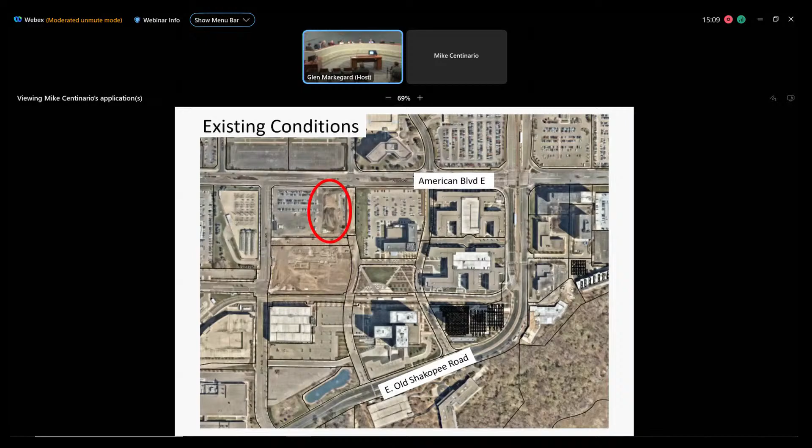We're familiar with the Bloomington Central Station area. It's within our South Loop district, so we look to not only the comprehensive plan, but also the South Loop district plan to inform our decisions on development within this area. BCS has been a development that's gone in phases since the early 2000s, and this is the latest residential phase.

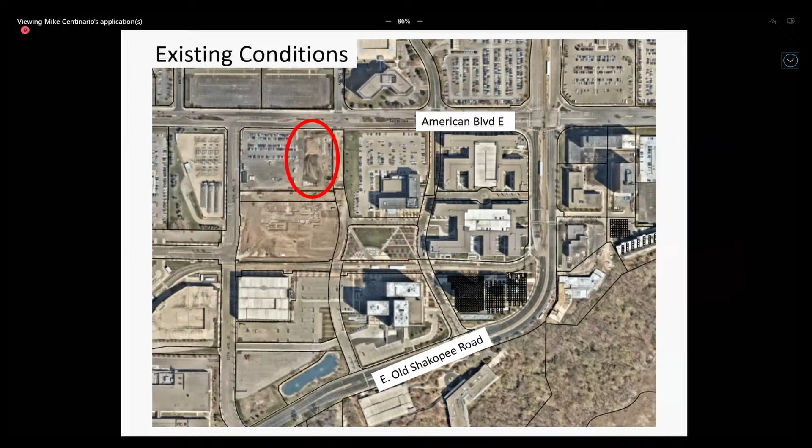You can see the site circled in red, essentially just northwest of the Hyatt Regency Hotel along American Boulevard and 31st Avenue. Here's a nearer-term image from last year. You can see BCS 4, or Carbon 31, under construction in this image, and that of course included Oxendale's grocery store, which was a huge improvement to the neighborhood to provide a grocery retail user.

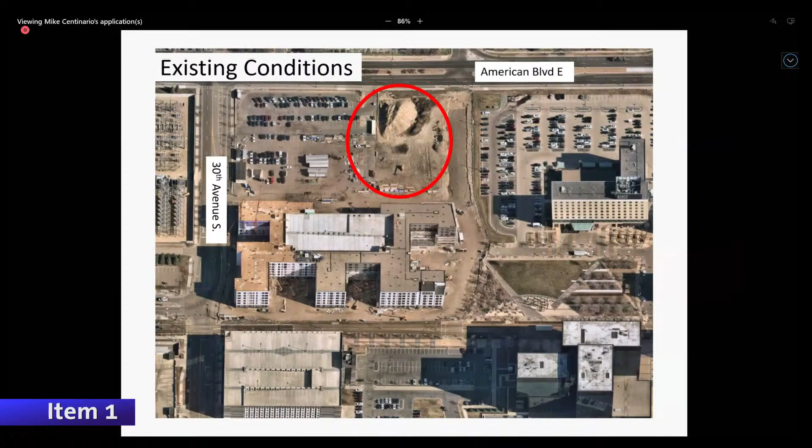This particular development is not proposing any retail, which I'll get to in a moment, and it's not proposing any affordable housing. We do have a code requirement related to affordable housing, but we also have the opportunity for a developer to pay fee in lieu, and that's what the property owner and applicant is seeking, to pay fee in lieu of affordable units.

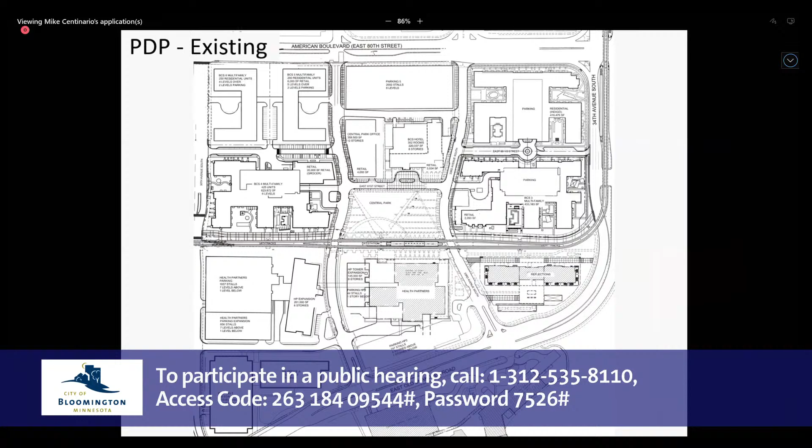Bloomington Central Station has an extensive PDP, preliminary development plan, and obviously we're not going to go into a deep discussion on the PDP itself. We're going to focus on this particular phase. So this is the existing PDP, and I'll zoom in to show you what is in place today.

The BCS 5 multifamily plan calls for 250 units and 6,000 square feet of retail with a mix of structured parking. That is why the applicant is seeking a major revision, because the unit count is proposed to go down and the applicant is proposing to remove the retail element.

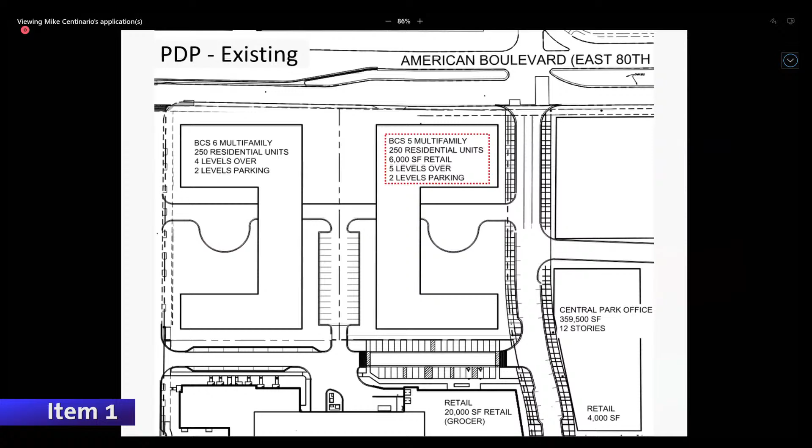So what I have here is the proposed PDP with the changes being implemented with the application, here is what's being proposed. Obviously, we go from the existing PDP, which just has building placeholders, to this, where you can see the actual footprint of what's being proposed. You can see the walkouts, how they relate to 31st Avenue and American Boulevard. You also see the unit count go down from 250 to 164, and the parking configuration is a little bit different, but the retail is no longer an element. It is directly across the street from Oxendale's.

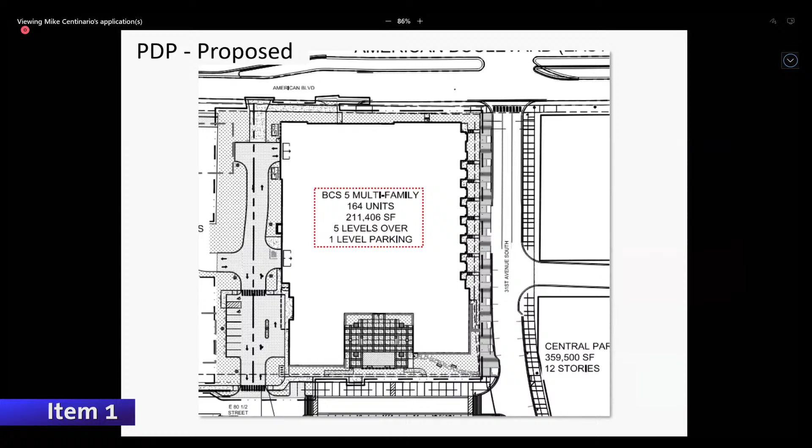In terms of code compliance, they are proposing to meet city code for trees and shrubs. We would have a landscape surety to ensure that it's planted and maintained. But again, a very significant amount of street trees, which helps that urban character.

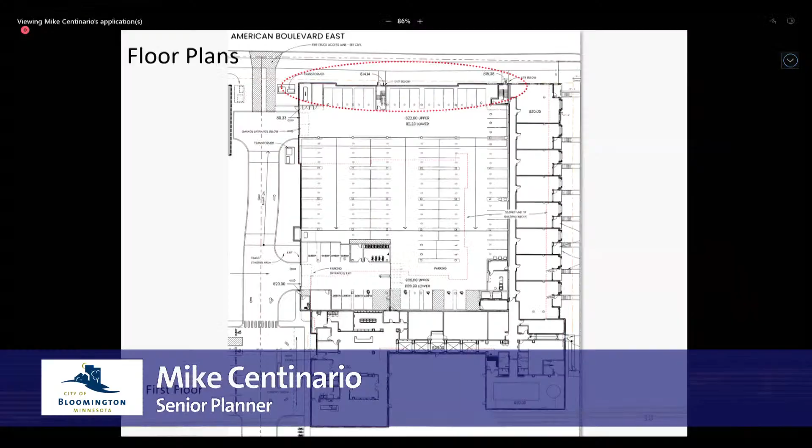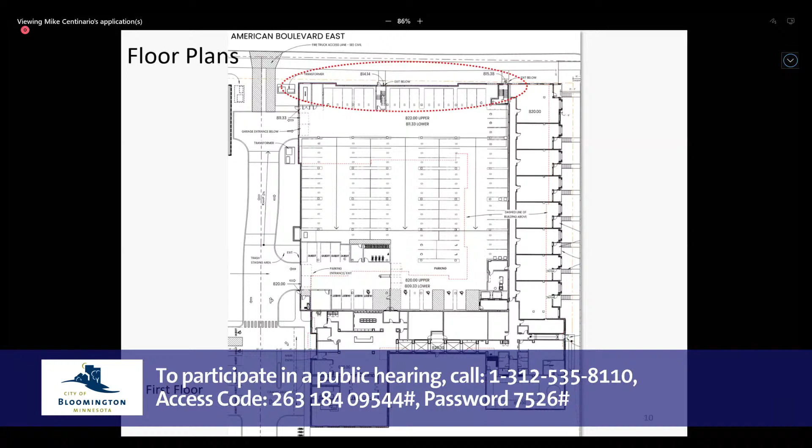A couple other elements on the design that I wanted to mention, which as staff we were really happy to see. This is a 5-story building, and on the east side you can see these walkout units, which we think is a really nice addition to the neighborhood, with windows, porches, and steps along the street. But when the applicant came before the city for pre-application meetings, we noticed there was structured parking on grade level, and we expressed concern that we didn't want to see a blank wall, because that wouldn't add much to the public realm.

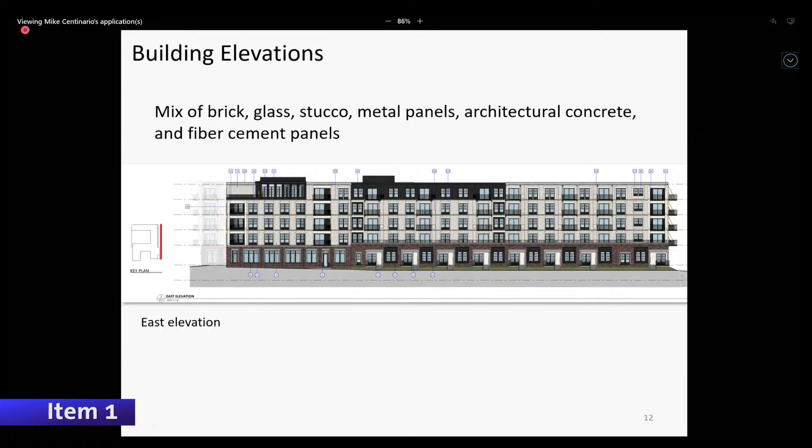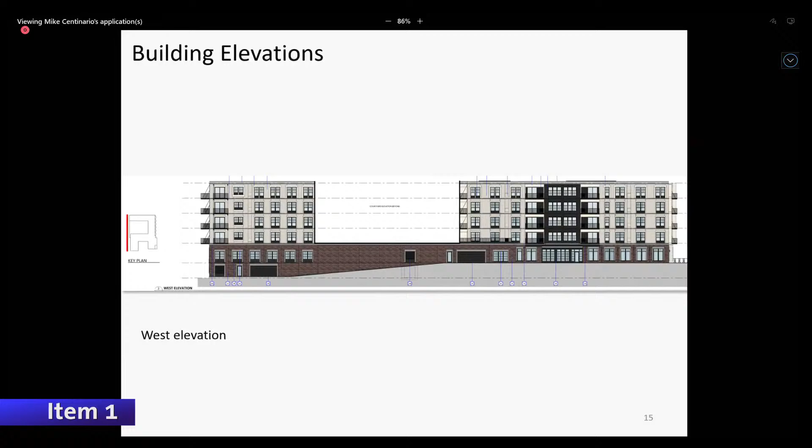One more elevation view, I'll get to the courtyard areas, which was the topic of discussion in my report.

This is the one area of flexibility that staff is not supportive of, and that is those inner courtyards essentially on the west side of the site. So they're not as visible, certainly, but because the applicant isn't proposing any affordable housing, they're not eligible for exterior material allowances to allow that secondary material to go up.

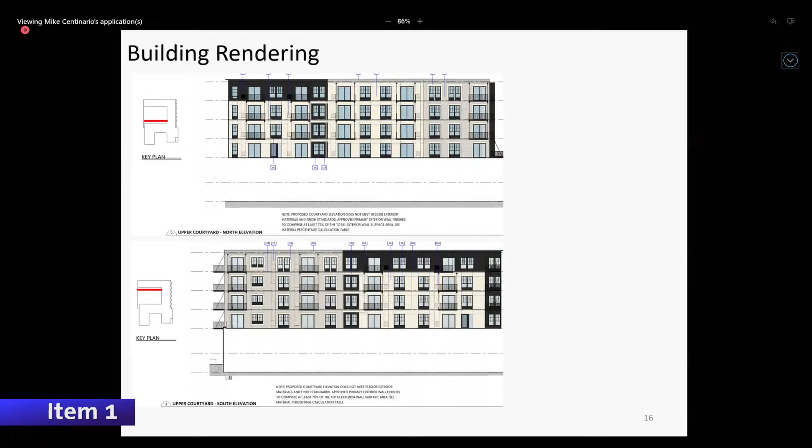Essentially, in this case, they want to have more fiber cement than would normally be allowed by city code. Fiber cement is a perfectly nice material, but we contend that it is painted, so inevitably it's not going to be as durable. The finish is not going to be as durable, certainly not as much as brick or stucco or glass. So we do have that limitation. While we're overall very supportive of the project, the conditions as written essentially just mean the applicant has to revise these small areas of the building to meet city code.

Parking, of course, is something that we look at. The parking calculation for senior housing, again, this is an age-restricted development. It's very simple, and so their parking requirement is 246 stalls. They're proposing 223. Most of that supply is coming in the form of those garage spaces, and then there are 18 spaces that are essentially allocated for this development.

We asked the applicant to prepare a graphic so we're not double counting stalls between different developments. So this is all shared parking, but we want to ensure that 10 stalls don't count towards 3 different developments. In any case, the amount of flexibility that the applicant is requesting is under 10%. Generally speaking, we find that the demand within Bloomington Central Station and South Loop District is less than city code, and so while this is flexibility that's being requested, we think the parking supply is more than sufficient for this development.

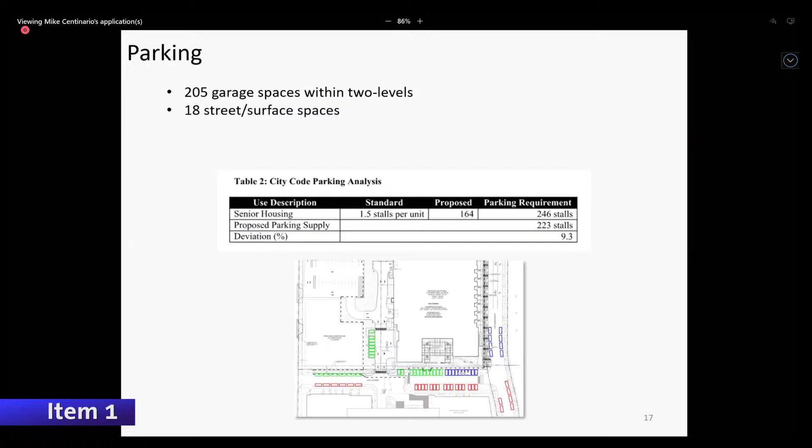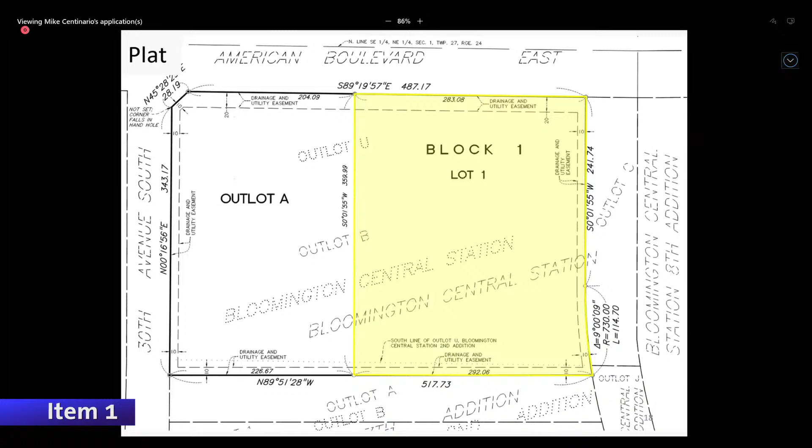Lastly, this is an image of the final plat. This is the instrument that creates lots, and the yellow box is where this development would be constructed. Then you can see outlot A, and that's really just the remnant that would be for BCS 6, should that move forward. So we are recommending approval of all of the elements: the preliminary development plan to change those characteristics of development, the final development plan for the 164-unit senior apartment building, and then the preliminary and final plat.

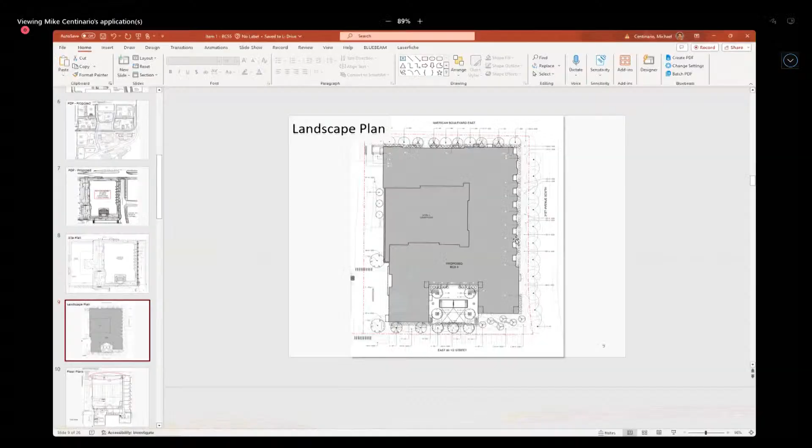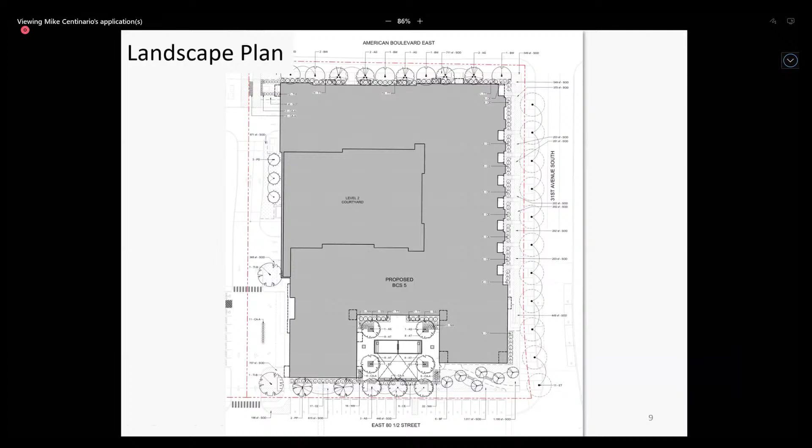Sure, absolutely, Commissioner. I think it'd be helpful if I go to this, it makes it easier to see. So commissioners, again, this is the landscape plan, but if you can see where it says level 2 courtyard, these are the 3 elevations, that interior courtyard area that they're seeking flexibility for. More specifically, they're seeking to increase the amount of so-called secondary materials. The code outlines what secondary materials are. They want that to be significantly greater than the allowance, which is only 15% of each building elevation.

How that relates to the Opportunity Housing Ordinance is that if you're providing affordable housing, the more affordable housing you have, the greater percentage for affordability, there's different levels of flexibility from that standard. So if you have a very affordable development, you're eligible to have less primary materials. Essentially, it's a development incentive for affordable units. Since this application doesn't include any affordable units, we didn't really see a compelling reason to support this flexibility.

Other questions for staff? Commissioner Goldsman: Thank you, Chair. One question about the courtyard. Is the courtyard a private use, or is there public access to that courtyard?

Sure, Commissioner. This is a level 2 courtyard, so it would be private. I'm sure folks will have parties and such, but it's for private use. Private use, thank you.

Commissioner Cookton: Thanks, Mr. Chair. Mr. Centinario, I believe this is zoned HXR. Does the HXR zone have a transparency requirement on the ground floor?

Commissioner, it does. Let me go to... I did not include those drawings, but thank you for bringing them up. There is a transparency requirement along streets, and in the application materials, the applicant included graphics that measured all of the transparent materials, and by all accounts, it looked like the application was meeting the transparency requirements.

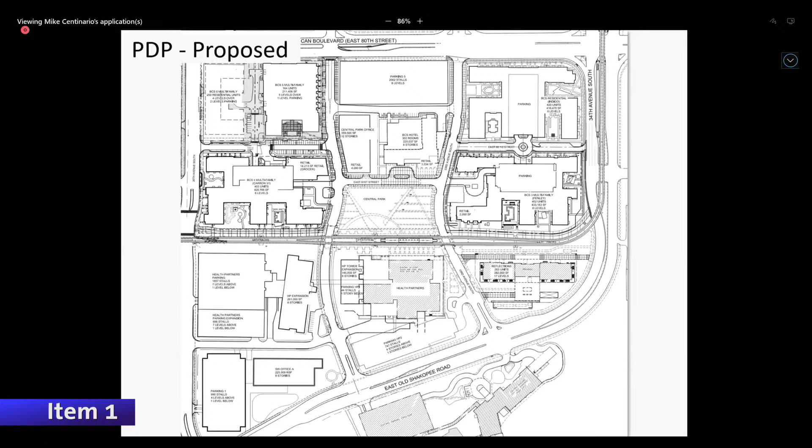Health Partners has existed in this area for quite some time. Reflections was developed shortly after, the beginning of this Bloomington Central Station vision, and that was obviously two glass condo towers. I'd have to look to Glenn to reach back in his memory and remember what those original PDPs envisioned, but I suspect it was more building height, more towers, greater proportion than what we're seeing now.

What's been developed in terms of residential has been 5- and 6-story residential buildings. The three previous residential phases are 6-story, essentially 5 stories on one level of concrete style development. And this one that we're reviewing tonight is 5 levels.

Chair Roman, Commissioner Curry, some of the major changes over the years at Bloomington Central Station with their preliminary development plan, probably the first on the far eastern side. Originally, there were proposals that the residential units would be in more tower format, similar to Reflections. What they ran into was just financial realities, that the cost of that construction was not penciling out. It was not financially viable. So they switched to more of a wood frame design for the two phases on the east side to the north of that.

The density did not change, and in fact I think it even increased a little bit relative to the previous plan, but the style of the units changed. And then on the western side, the main change has been, over time, the conversion of office space. When this was originally proposed, there were a lot of office buildings proposed, which market conditions do not support anymore. So several of those planned office buildings have been converted through plan amendments to residential.

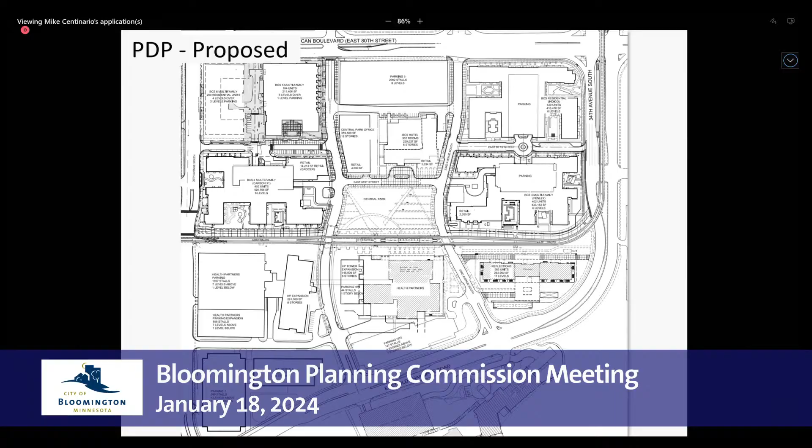To add to that request for flexibility, we're imagining that the intent of the exterior material standard is to ensure a positive impact on the public by guaranteeing a certain amount of high quality building finish. Based on the fact that these elevations are largely not visible, we think we're meeting that intent and really not affecting the public realm at all.

There's vertical separation - that courtyard and those elevations are elevated 14 to 22 feet above the adjacent grade. The west elevation is the only one that directly faces a right of way, and that's 31st to the west, more than 400 feet away from that right of way.

The north and south elevations, while not facing directly a right of way, are still very far removed from American Boulevard and 80th and a half to the north and south respectively, by more than 200 feet in both cases. So given that vertical separation and the distance from where they can be viewed in plan, it makes sense, because they really are virtually invisible.

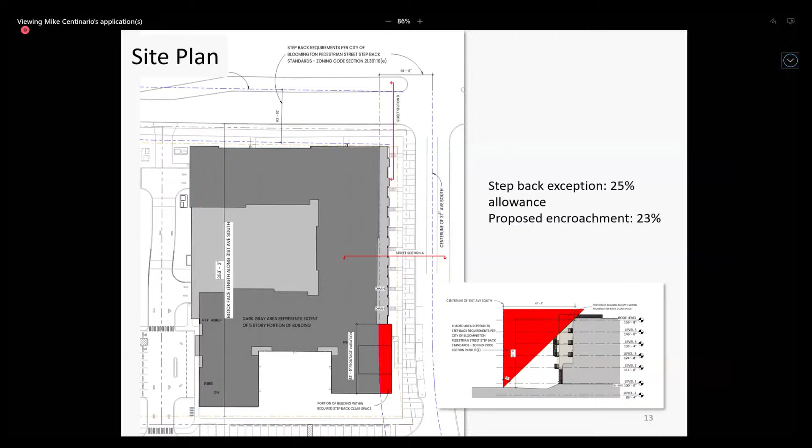Furthermore, for any potential oblique views, like from American or 80th looking diagonally at the project, we've essentially continued the primary material proportions around the corner for the first 35-plus feet. So we've got 95% primary material for the portion you could possibly see obliquely. So the concentration of secondary materials is relegated to a zone that's not visible by the public.

And with that, I'll turn it back to Joy or Johnny. I appreciate your time. Thank you, Ryan. I don't have anything else. Yeah, I just want to say thank you. We're really excited to keep the momentum going in BCS. If you have any questions for either Joy or myself.

Thank you. Questions for the applicant. Commissioner Albrecht: Thank you, Chair. My questions are regarding the market in both the city of Bloomington and in the region. What is the absorption of senior housing in either the market, the region, or the city of Bloomington? And what are you seeing in terms of senior projects and parking absorption in those projects? Are you seeking deviations in other locations?

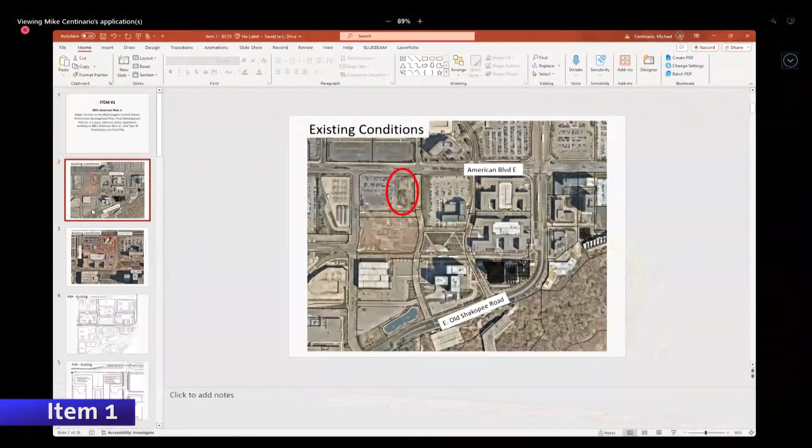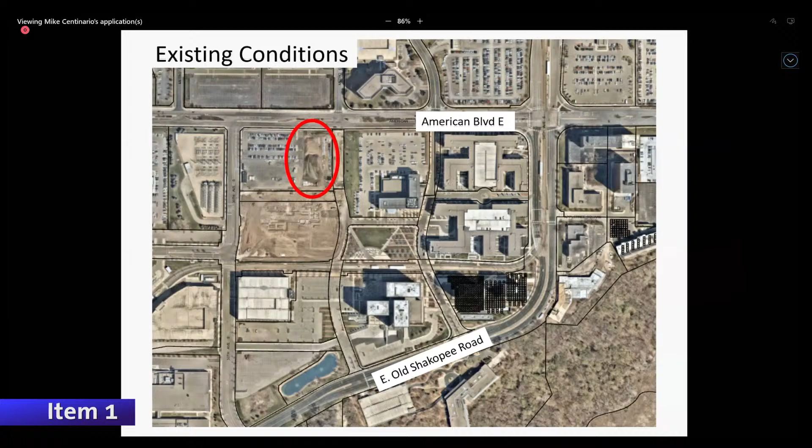Commissioner Goldsman: Thank you, Chair. If staff could bring up the aerial view of the map, specifically showing the additional development opportunity. I know it's to the... I'm bad with cardinal directions here, where that parking lot is. We're looking at another potential development, correct?

In that development, is there any retail space opportunity, or is it strictly residential? Commissioners, the PDP that they're proposing shows it as 100% residential. Again, that could evolve, but they're not proposing any retail space on the BCS 6 phase. Great, thank you for answering the question.

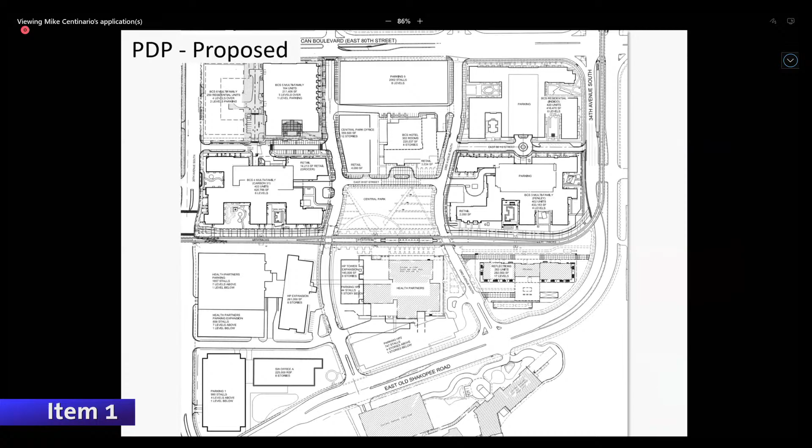And I know there was some discussion in the materials we have, but on the south elevation facing 80th and a half, there is, at the southeast corner, a different setback than at the southwest corner, but then there's a fairly significant setback in what I assume is intended to be the front of the building. Talk about that. I understand there was some reference to utility easement, but generally how do we have something that is not aligned with the urban character of the neighborhood.

Yeah, I can address that, and if Ryan could unmute himself to help me, that'd be great. So on the south side of the building, that is our grade level courtyard there. We hope to activate that space with some grilling stations, furniture, and turf. But the reason why we held the building back a little bit is to gather those views of the park right across the street. That was one motivating factor for us.

Also in that area, the Oxendale's parking is head-in, very close, so that gives a little bit of a break. Ryan, do you have a probably more eloquent response than that? I think you did a fine job, Joy.

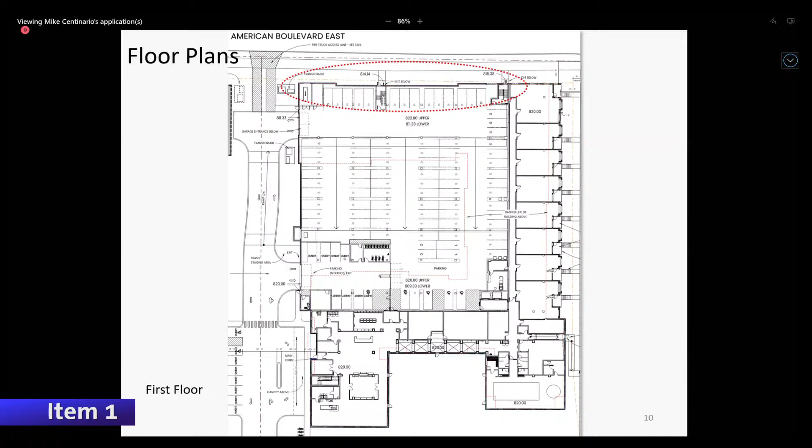That's exactly what we did, and at grade by pulling what you can see is the pool room back. It is a gesture towards the Central Station Park, but also provides additional at-grade landscaping opportunity that we took advantage of in the landscaping plan. Other than that gesture, our forward-facing faces of the building are pushed out almost as far as we can push them, so that we actively engage the street and create that premier pedestrian experience that's been a signature of the previous BCS developments.

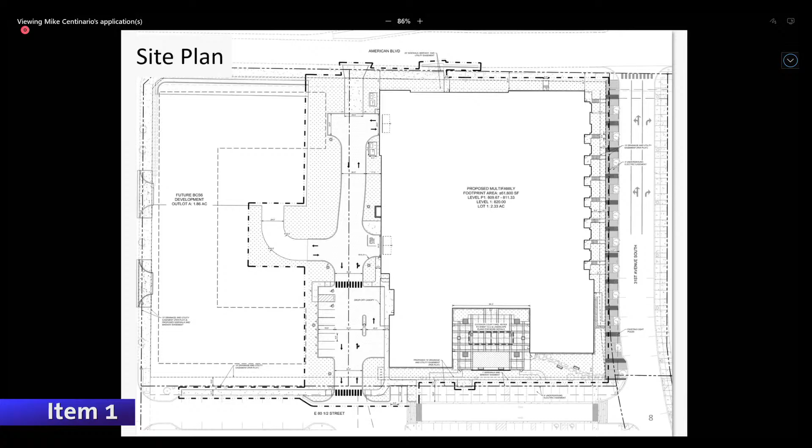Thank you. Other questions for the applicant? Commissioner Cookton: Mr. Chair, thanks. Ms. Jerem, the walkout units, is that something you like, or is that my city staff colleagues pushing you to do that?

I actually like those units. They're great units for people with a pet. There's a park right down the street. Speaking construction-wise, it also works out well. We've got a nice concrete podium there, and those units don't have to stack with the ones above for plumbing lines, so we can create something special on the street. Okay, thank you. Other questions?

Other questions? Thank you. You're good. Thank you. Thank you very much.

This item is a public hearing, so I would invite any member of the public who would like to testify on this item to the podium for a 3-minute testimony. Seeing none, and seeing none online who are not staff, I would entertain a motion to close the public hearing.

So moved. Second. Thank you. We have a motion and a second to close the public hearing. Discussion? In favor, say aye. Aye. Opposed? The public hearing is closed. Discussion on the proposal.

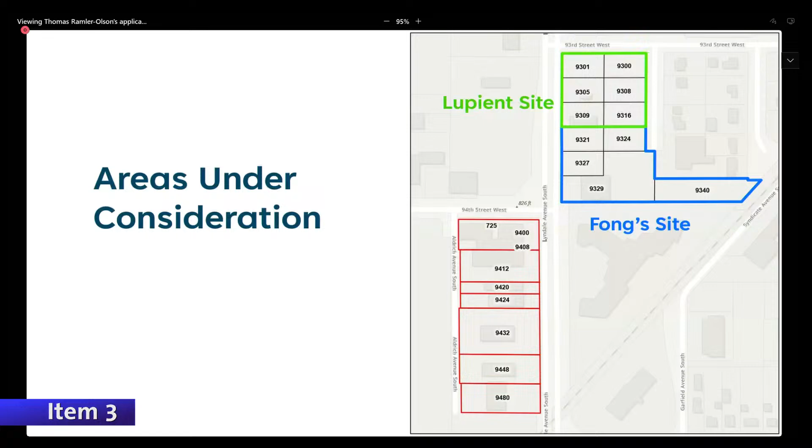What brings this item forward, as was hinted before, is the suburban retrofit plan that was approved back in 2021. We recognize that it focused on certain nodes along the stretch of Lyndale, one of the nodes being at 86th and 98th.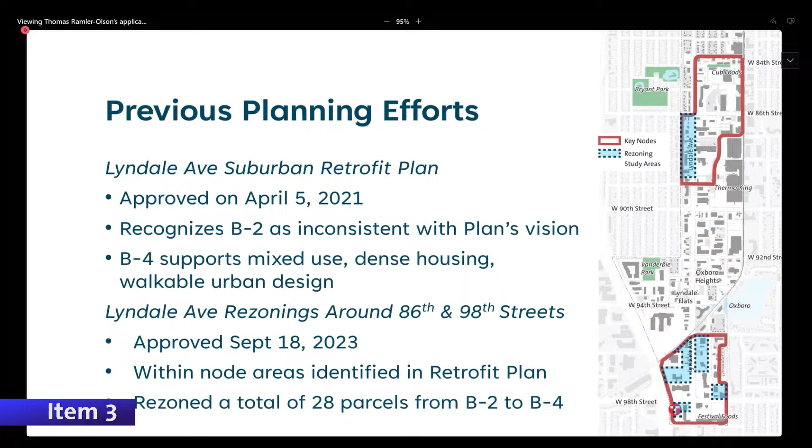If you recall, back in September of last year, City Council approved some rezonings—you also saw those on August 17th of that year. Those rezonings were approved, going from B2 to B4 in line with the recommendations in the retrofit plan. What the retrofit plan was unable to foresee, or hadn't realized at the time of its adoption, was that there was a new node developing at 94th Street.

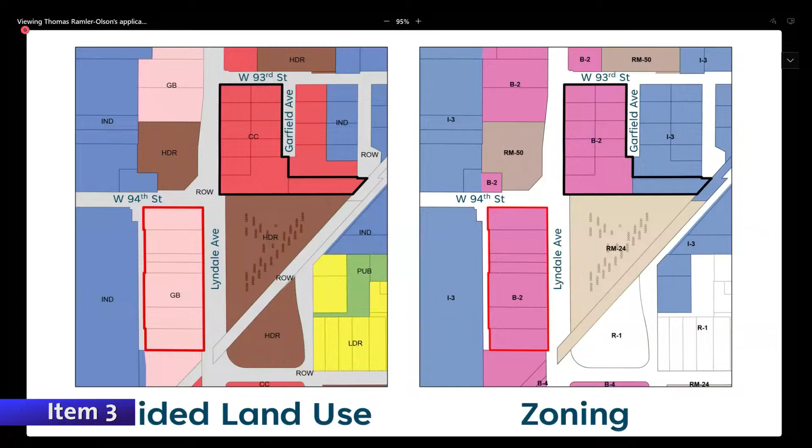These are maps illustrating the guided land use of the properties in question—what they're guided for in the comprehensive plan—and the surrounding land uses as well. On the right is the zoning. Obviously they're B2, but there's a variety of zoning districts around them that ought to be considered when deliberating.

As shown in the guided land use map on the left, the two land uses are general business and community commercial—those are just descriptions to get you familiar with them. You're probably familiar with B2, and it distinguishes itself from B4 by allowing more auto-oriented uses, which is something the retrofit plan wanted to reduce the presence of on Lyndale Avenue.

I should say it's been recounted to me—I wasn't there when the suburban retrofit plan was being written—but there were discussions that conveyed some comfort with having B2 properties along Lyndale. It wasn't recommending rezoning all properties to B4. So that's just something to keep in mind when you're deliberating about whether these are good candidates for rezoning.

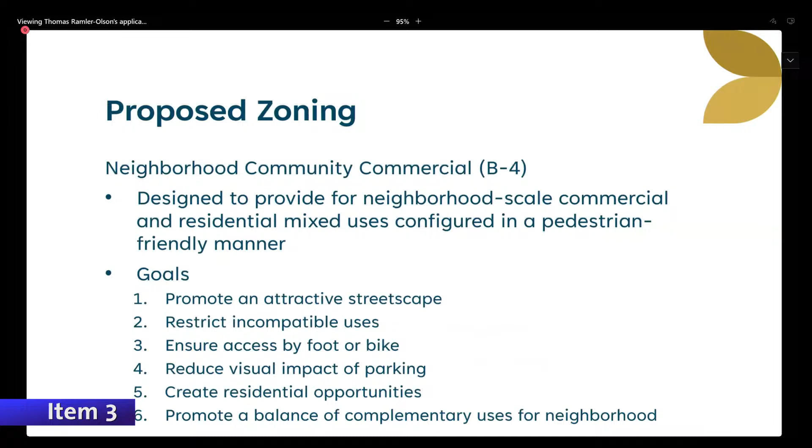B4 is also distinct from B2 by offering more neighborhood scale development, something that appeals more to the pedestrian and creates a more pedestrian friendly environment, more attractive landscape, and ensures access by foot and bike. So again, encouraging multimodal use.

Something that's always at the top of mind when you're considering rezonings is use, or just nonconformity. Are you creating nonconformities by rezoning? That is certainly a concern.

As far as the analysis that went into this part of the research, we looked specifically at use. It's kind of hard to delve into some of the site characteristics and whether they would comply with the new zoning. There are definitely lots that don't comply with the minimum lot area for B4, but that map I showed earlier shows definite potential for site assembly, so you could facilitate a larger development in line with the retrofit plan.

So use conformity seems to be the more operative concern. In that instance, there are a few nonconformities that would be created if rezoning to B4. There's presently an auto dealership along Lyndale in the area defined as Lupient, and there's also an auto repair place in the group of parcels just southwest of the intersection. So some nonconformities would be created.

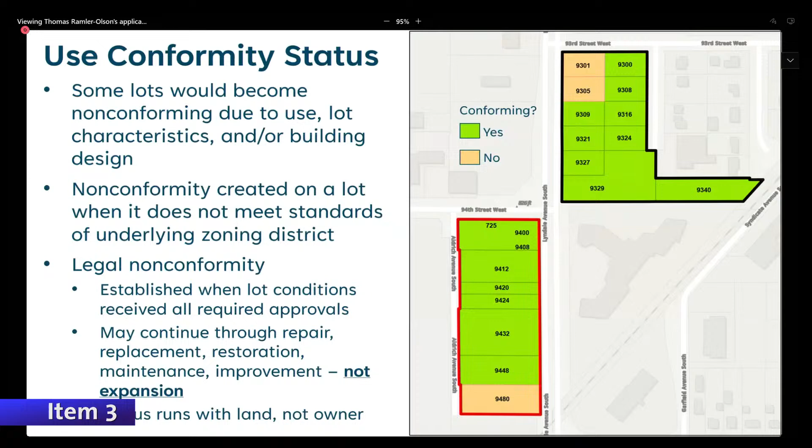As far as engagement, staff reached out to the Lupient representatives as well as David Fong's, and we had a conversation, explained the proposal, and answered any questions they may have had, to get their take on what staff was pursuing.

If we get direction to consider those parcels southwest of the intersection, we'll do the same sort of engagement activity. It won't be very widespread, but it will focus on those parcels under consideration.

Next steps after this are to bring this study item to council in February, and also a resolution to initiate that rezoning, and then over March and April hold public hearings to consider the rezonings. And with that, I can take any questions you may have.

Thanks. You mentioned that you had reached out to property owners. Is there a general sense of what you heard? To the extent that you can share?

To the extent I can share. Glenn, do you think I can share? I don't want to divulge anything, but yeah, it was a good back and forth.

The Lupient owners have had concepts before the city, and we've discussed that with them. Those haven't advanced, but nonetheless, they're still open to working with the city in order to find an appropriate development that would fit on the site, work with the zoning, and also the goals of the retrofit plan.

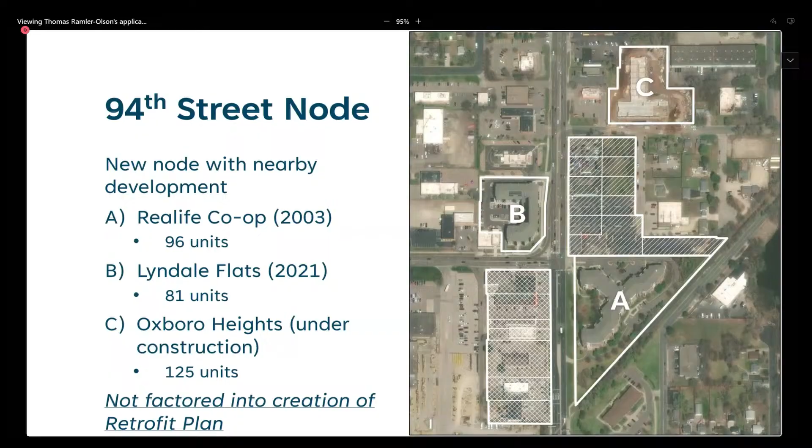The southwest parcels, I think, are also good candidates. I think we should proceed with that. Let's talk to those landowners. If there's a big problem, let's see what we can do about it. But I'd like to continue forward with investigation of those southwest parcels as well.

I think it's fascinating too, building on what you were just saying, is we're talking about B4 here, but at least in the northeast section, that could all end up being RM50, which again the applicants would bring to us. But I think we're talking about B4 because we're trying to make it less like B2, though it may end up being something completely different that is complementary, but not what we're talking about right now.

So, Commissioner Albrecht. Thank you, Chair. My only feedback on this is...

for staff to be cautious about the pushback from current property owners. I believe that we dulled down B4 by allowing pawn shop uses, and I think that we should try and maintain the spirit of the Lyndale retrofit plan. I know that was directed by City Council, but I was in disagreement with that. And I think just creating a precedent there that we aren't...

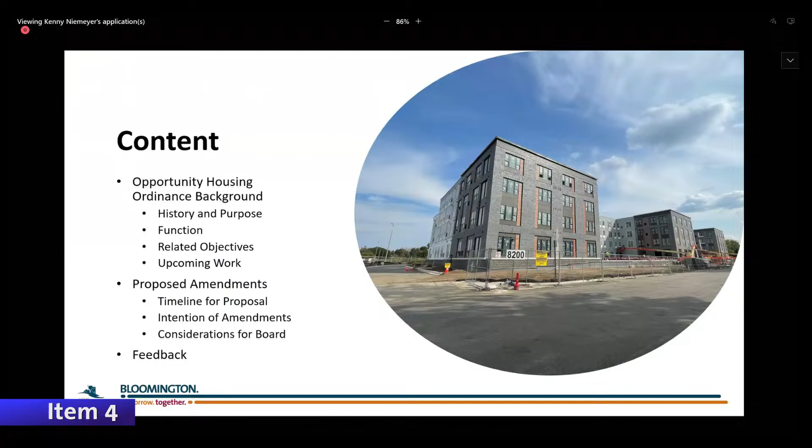The Opportunity Housing Ordinance is designed to encourage on-site production of affordable housing units and preserve existing affordable units, while not creating undue restraints to the financial feasibility of new market rate housing developments in the city of Bloomington.

This effort started back in 2019 with the Housing Nexus study that the city paid for, and it informed the incentives that are now part of the OHO today. It was adopted in 2019 and went into full effect later that year in September, after a 6-month review and implementation period.

This is really considered a living document. It's been amended in 2019, 2021, and 2022, sometimes more than once in those years, and it comes before the city council annually at minimum. It has also come before the commissions as review sessions and study sessions, but it primarily goes to city council each year.

Around September. As part of the OHO, the intention is to have a continuous process of feedback, assessing the outcomes and how developers are interacting with the OHO, and you can see that reflected in its purposes.

The primary purpose is to ensure that affordable housing is developed in the city of Bloomington, and that we're promoting flexibility in how those developments come to be, and that we're being adaptable to the changing economic circumstances, market conditions, and real estate conditions in the city and region.